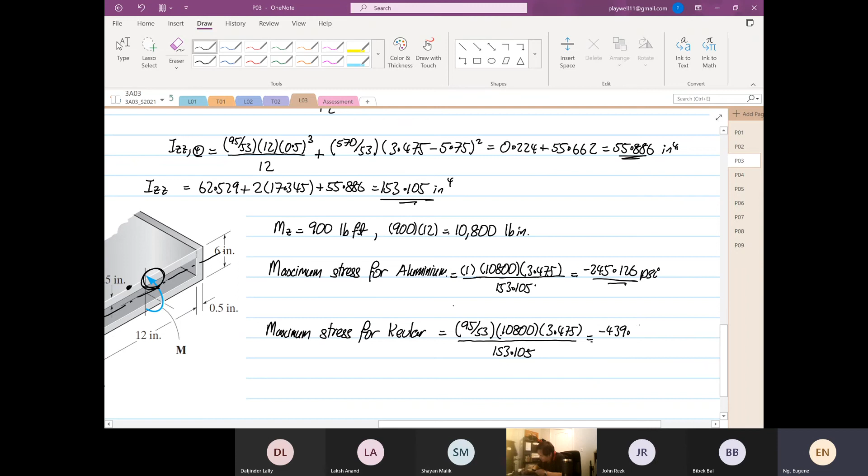Right. So this is equal to 95 over 53 times 10800 times 3.475 divided by 153.105. So this is equal to 439.376 psi. Okay. So we have to pick both from the top because the distance from the centroid is the furthest. That's why both are at the top and both will be under compression.

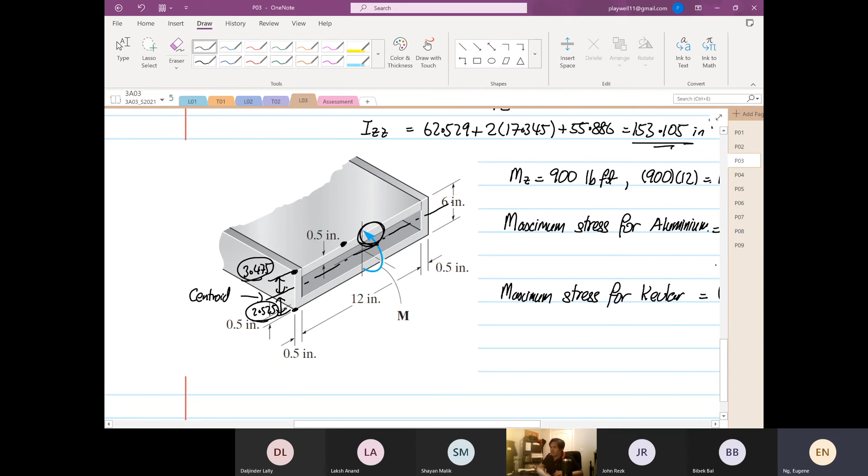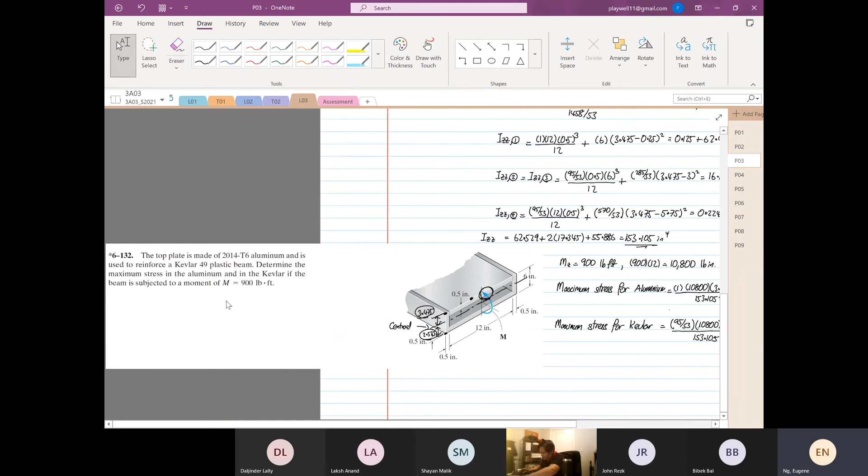So from here, this is the end of our series for bending moment. So the next one that we are going to go for is shearing stress. I like to highlight that shearing stress is one of the most complex topics in structural analysis. But I've made rules for you to apply that will make it easy.

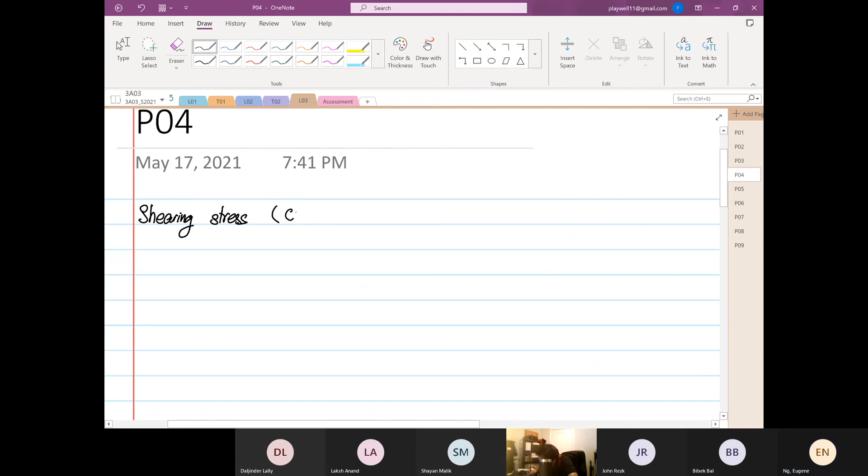So why is it difficult? It's because these rules have to be satisfied for your analysis to be successful. And this topic only has two formulas. I know you guys say, how come two formulas is so difficult? So we are looking at shearing stress. This is chapter 6 in your textbook. Okay, so shearing stress.

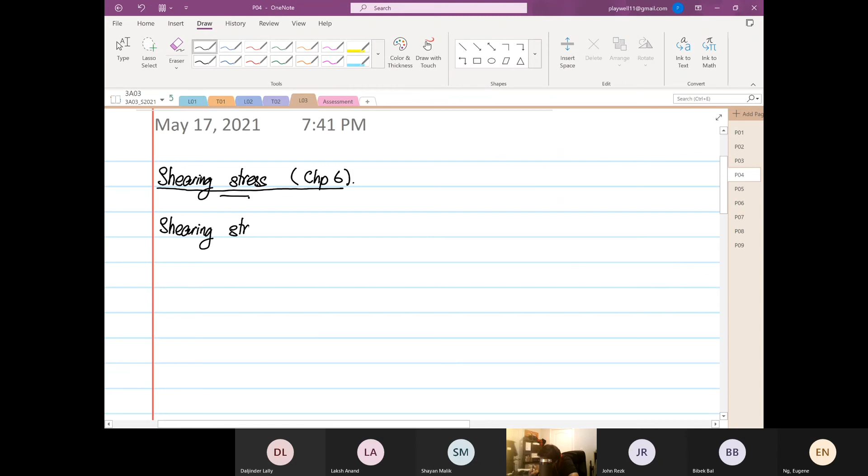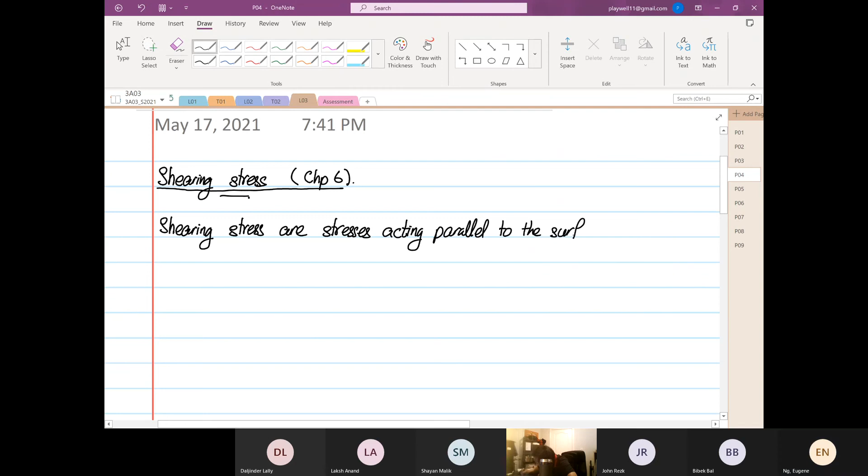So shearing stress: stresses acting parallel to the surface. So if we have an element, an element is a square, or the region of interest that you want to analyze. So if you look at a 2D element, and this is our transformation, this is x, and this is y, right?

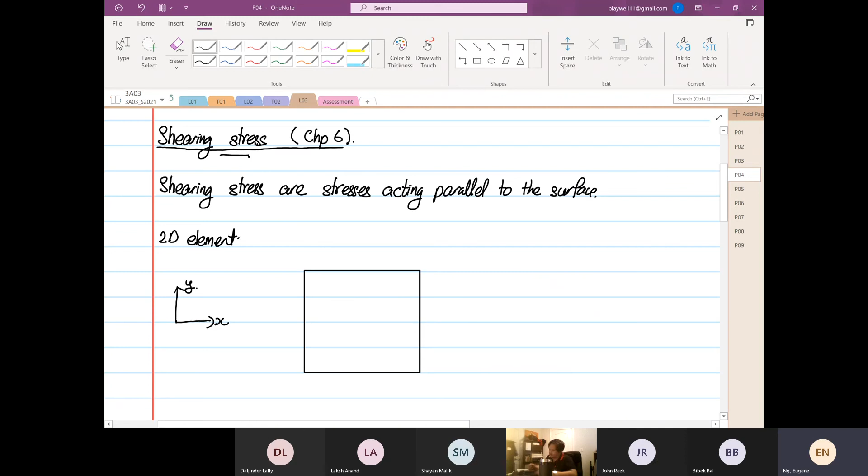So as the term says, shearing stresses are stresses acting parallel, not perpendicular, parallel. So this is our shearing stress, and the other element. Those of you that have done 303 with me, you know what I'm drawing. So this is our plane intersecting the x-axis, right? So if I draw this plane on the transformation, this is the plane. So the plane is intersecting the what? X-axis.

I better use a different color. All right, this is the plane intersecting the x-axis. And then the other one, this is the plane intersecting the y-axis. So if you look at this arrow that I'm highlighting in yellow now, this is the shear. The intersecting plane is x, and the shear stress is in the y direction.

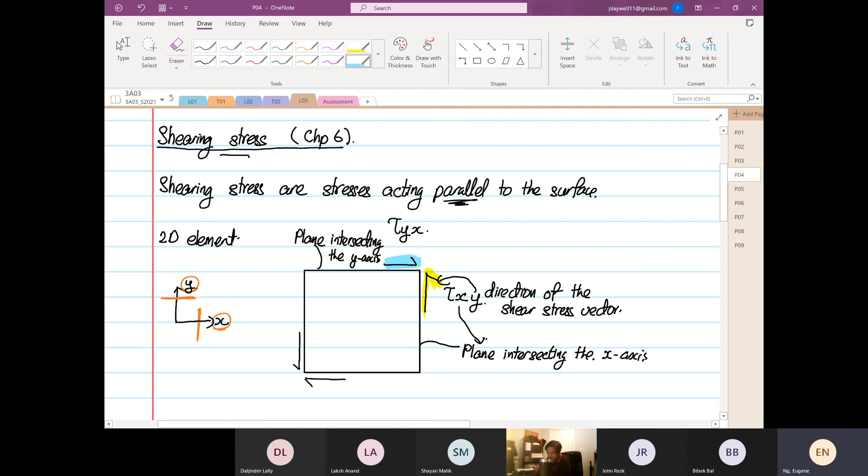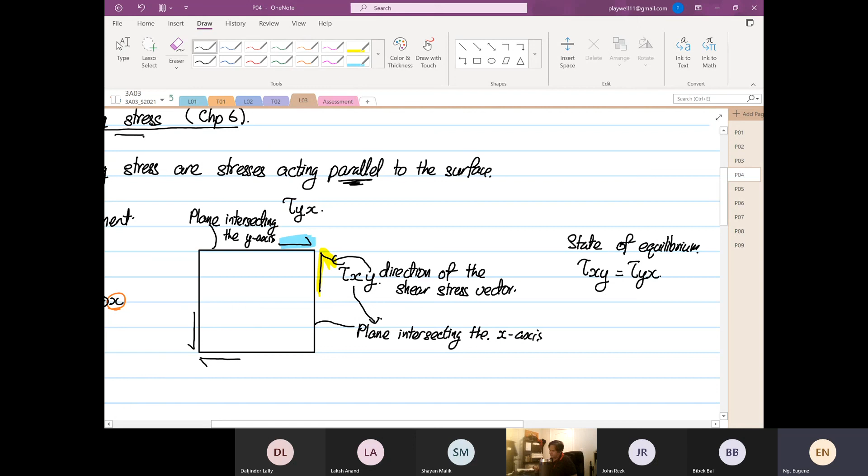So this term over here represents the direction of the shear force or shear stress vector. And the other side is shear yx, because the intersecting plane is y, and the arrow is in the x direction. And they have to maintain the state of equilibrium such that the shear in the xy direction has to be equal to the shear in the yx direction. So it has to comply to the state of equilibrium.

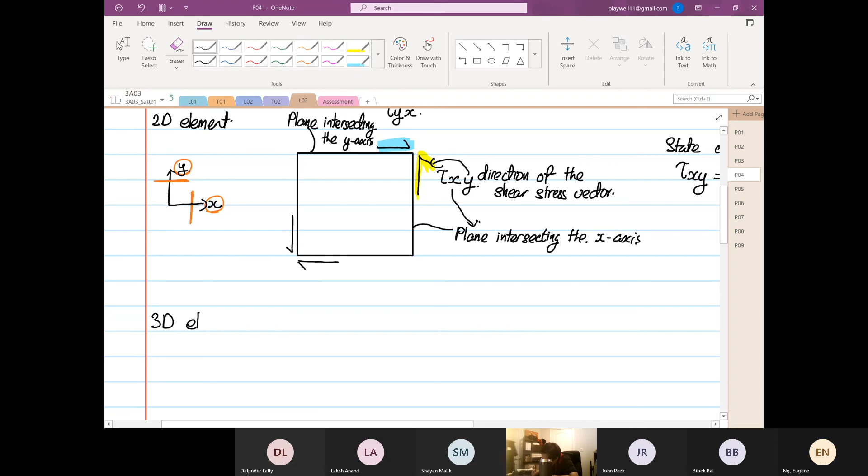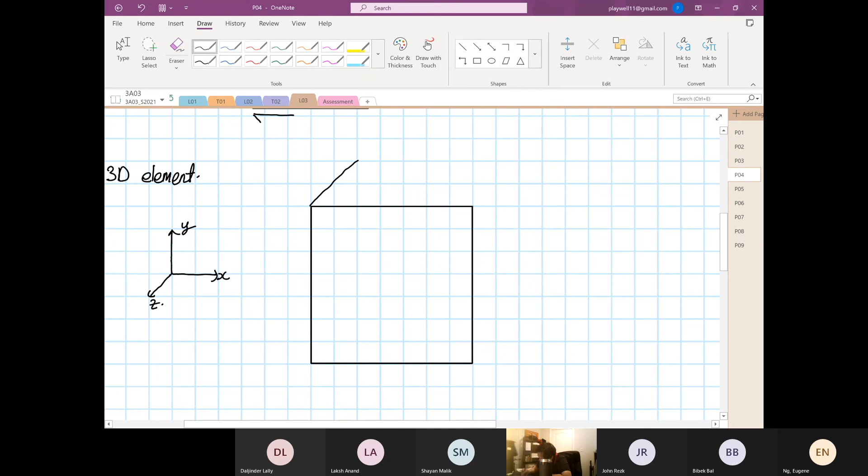So if we quickly look at a 3D element, I'm going to draw a 3D element now. Still this is my x, my y, and then this is our z. So I'm going to construct a 3D element. All right. So in a 3D element, there will be 6 different shear stress descriptions. So I'm going to write them for you.

So you have this one over here. The intersecting plane is x, and the direction is y. And then you have one over here: the intersecting plane intersects the y-axis, and the shear arrow is in the x. Then you have one more set acting this way: the plane intersects the axis at x, but the direction of the shear stress is in the z. And the other way: the intersecting plane is in the z, the direction of the arrow is in the x.

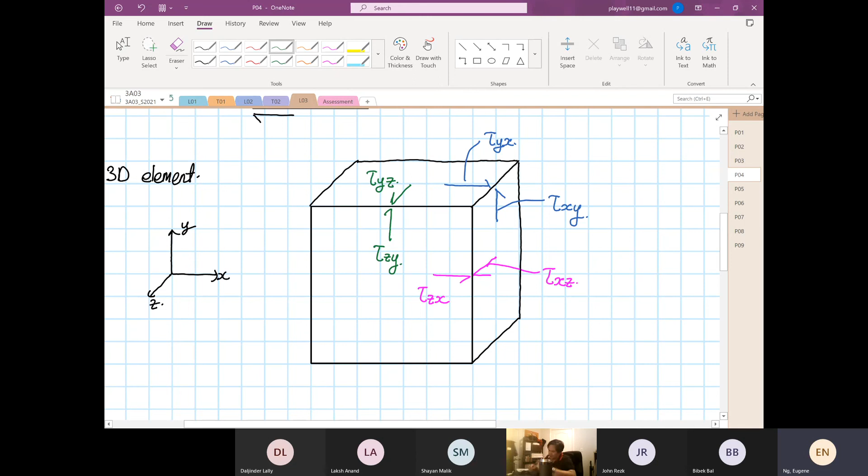And then the last one: the intersecting plane is z and it's going up in the y direction. The shear stress vector over here: the intersecting plane is in the y, and the shear force vector is in the z. And again, it has to comply to this set of rules where shear xy is equal to shear yx, shear xz is equal to shear zx, and shear yz is equal to shear zy.

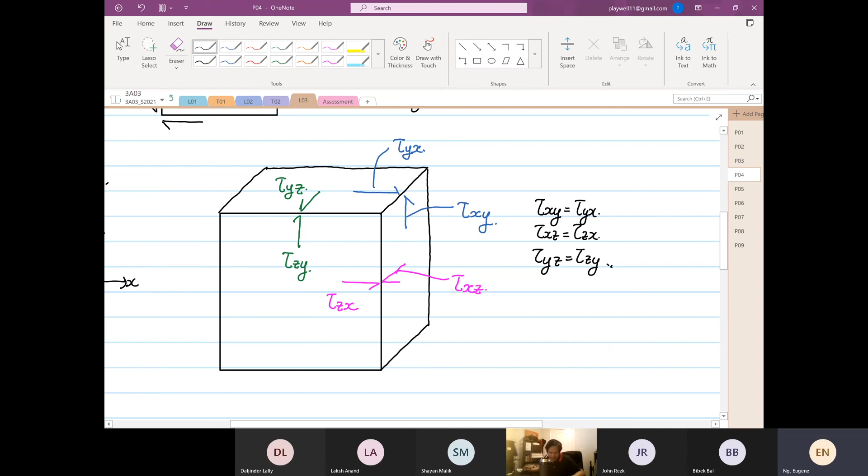Okay. Now, what I propose is we go for a 15 minute break. We come back at 8:45.